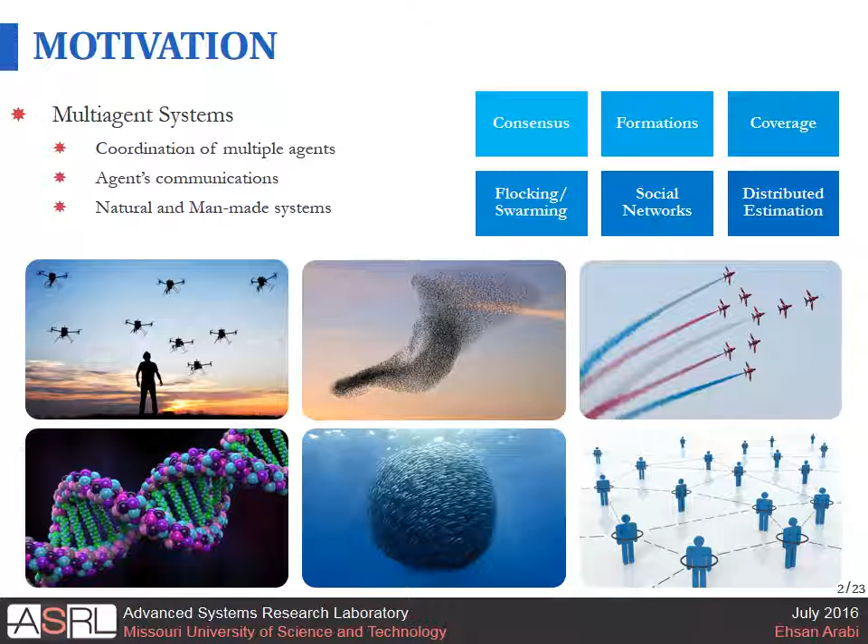So in multi-agent systems, we have two main sections. One is information exchange, and the other one is system computation. And since in a wide range of these systems we have open communication and computation platforms, they are naturally vulnerable to sensor uncertainties and also cyber attacks.

We can consider this problem as a classical estimation and control problem, but by doing so, it can only cover the case where we have just a fluctuation about the true value. But in the sensor uncertainty problem, we have measurement devices that are hijacked to degrade the performance. So this problem cannot be addressed using the classical estimation approach.

Therefore, for the sensor uncertainty problem, we don't know the behavior of the attacker. So we will use adaptive control in order to compensate the effect of sensor uncertainties.

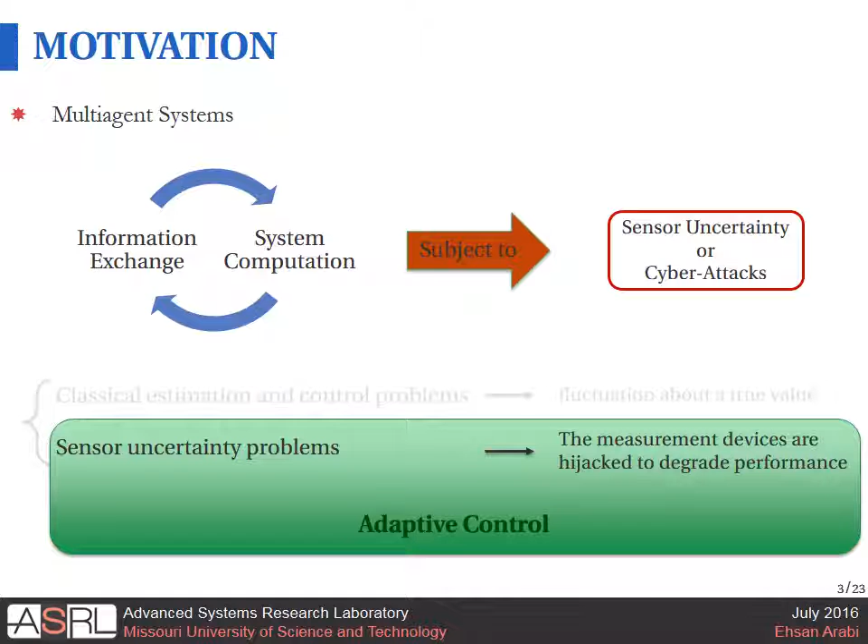As we discussed before, the key feature of multi-agent systems is the information exchange. This information can get corrupted by sensor uncertainties or by cyber attacks. So if we have two agents, I and J, if agent I sends Xi to agent J, it can be corrupted by a signal such as delta I. And it can be a time-varying attack or a constant attack.

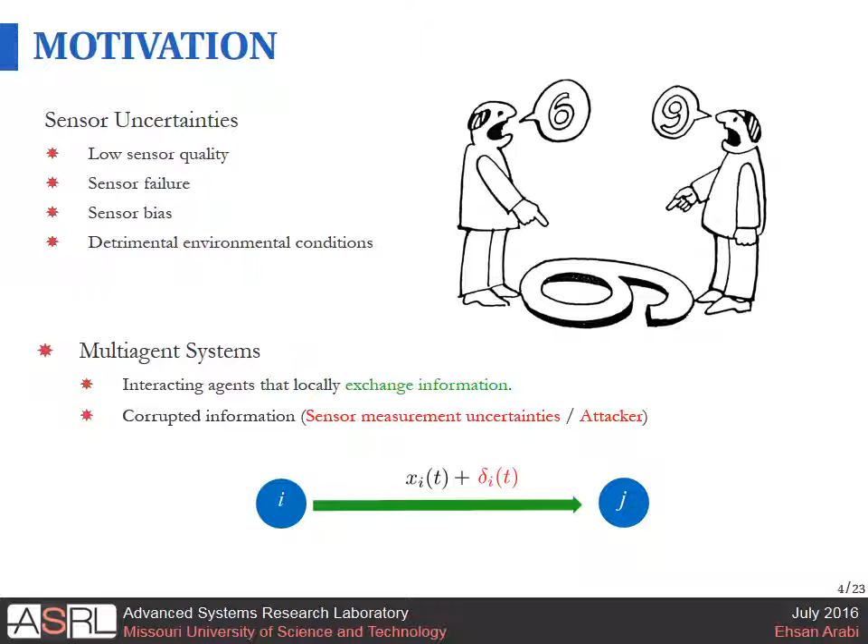We can consider several approaches for sensor uncertainty problems. The first one is classical fault detection, isolation, and recovery. In this method, sensor measurements are compared with an analytical model of the dynamical system, and by analyzing the residual signal we can determine if a fault has occurred or not.

In practice, it is difficult to identify a single residual signal per failure mode. And also, there is a common assumption in this method, which is all dynamical system signals remain bounded during the fault detection process, which is not a valid assumption, especially if we have some attacks that are state dependent.

There is another approach, which is packet losses or disturbances in communication. In this approach, communication links are subjected to disturbances, which correspond to packet losses. And the disturbance model is assumed to follow a particular stochastic process. This model does not necessarily capture the behavior of an attacker.

So, in order to address the sensor uncertainty problem, we will utilize adaptive control architecture to be able to compensate the effect of time invariant and time varying sensor uncertainties.

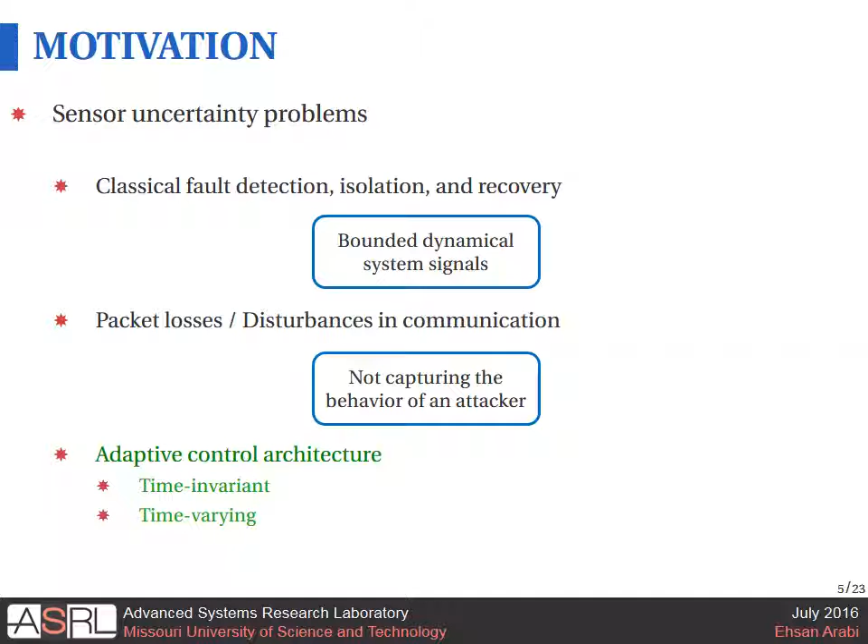Why are we using adaptive control? Because in fixed gain controllers, there's always a trade-off between the performance and the uncertainty. These controllers cannot improve themselves, and also they are tuned to a worst case condition, and they assume that the future will be much like the present.

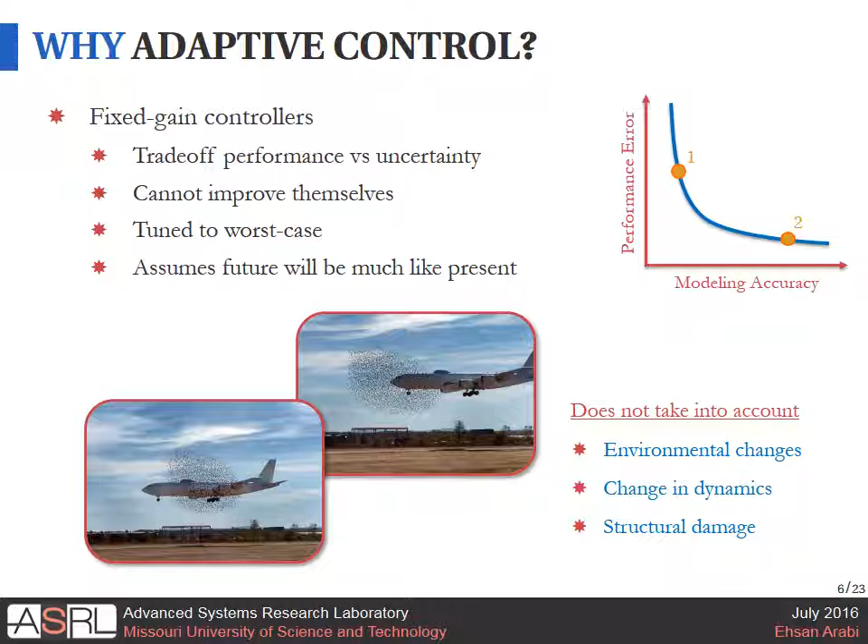And also, fixed gain controllers do not take into account environmental changes, changes in dynamics, and structural damages. As you can see from the figure, for a fixed gain controller, in order to improve the performance, we need an accurate model.

On the other hand, adaptive controllers, they can tune themselves to achieve a given performance, and they do not rely much on the modeling. They can improve themselves under some adverse conditions, and they are not just tuned to the worst case conditions.

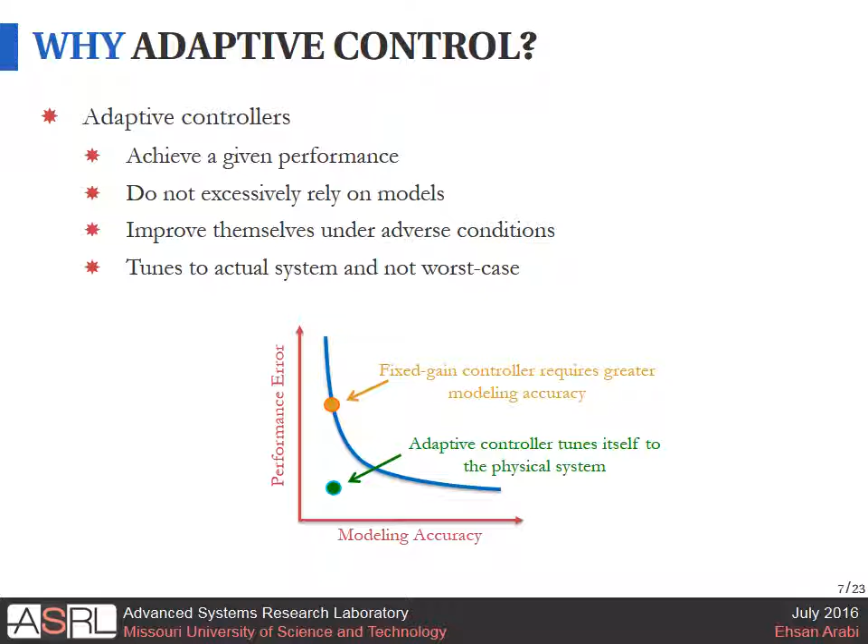So we are going to introduce a problem formulation. We assume we have multiple agents, xi. They have this dynamic: xi dot equals A xi plus B ui, and there's two layers. We have an agent layer, which is a physical layer, and we have another layer which is a control layer.

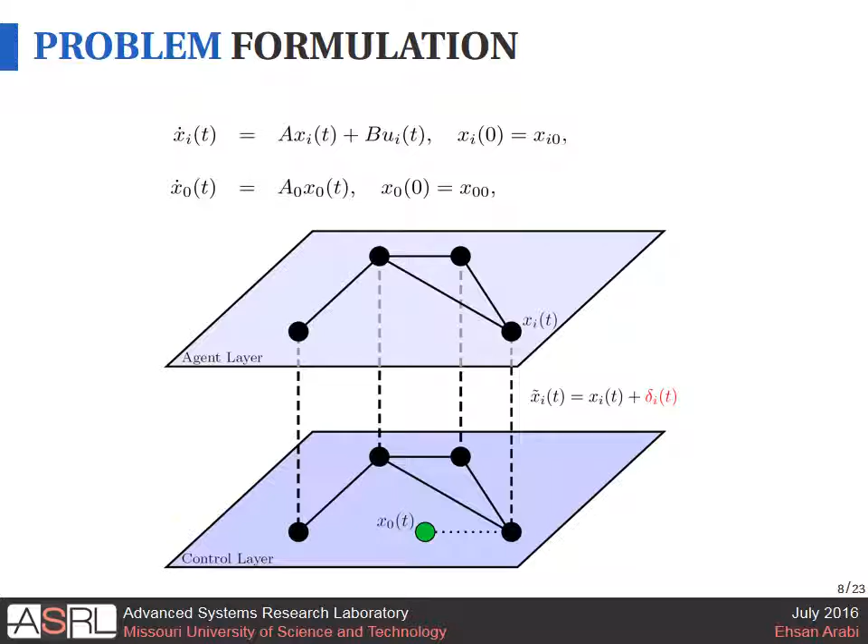So in order to design a controller which can converge all of the agents to follow the leader, if we do not have any uncertainty in the system, if delta I is 0, then we simply can introduce the first expression for ui using the true value of xi and xj in order to achieve the following of the leader.

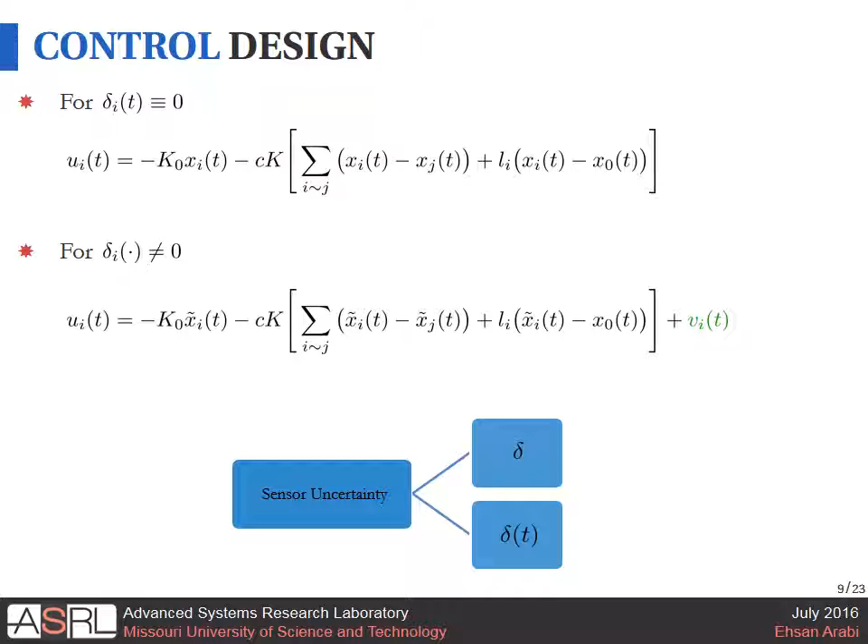But the case that we are considering is that we have sensor uncertainties, so delta I is not 0. For this case, we only can use xi tilde in the controller, which is the corrupted signal. And at the end, we added a signal vi in order to compensate the effect of this sensor uncertainty. Vi is called the corrective signal. And we consider two cases here: a constant sensor uncertainty delta, and a time varying one, delta of t.

For the first case, for time invariant sensor uncertainties, we have just a constant delta. We propose this corrective signal in the blue box vi using estimation of delta, which is shown by delta I hat, and also we have two update laws, delta I hat dot and x I hat dot, in the red box.

And in these update laws, we have a P matrix. We can obtain P by solving the LMI shown in the red box, and in order to avoid some complex computation, we use K matrix as inverse of Q matrix multiplied by B transpose P. This will convert our LMI to a simpler one, and by picking the value for C such that we can achieve the green box, we can solve for P. This LMI can be solved easily using some toolbox, and after solving for P, we can plug this into the update laws and obtain the corrective signal VI.

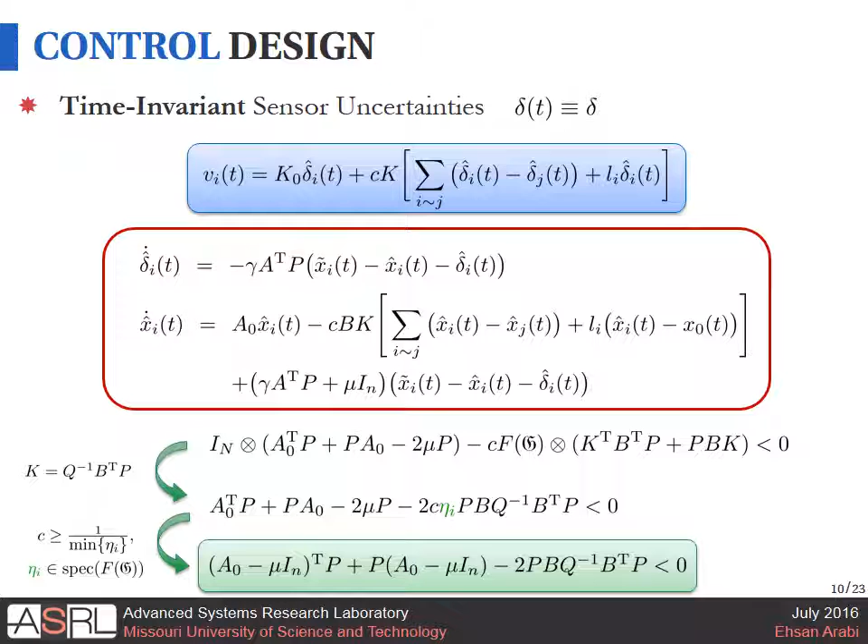So if we define the error signal EI as xi tilde minus x hat minus delta hat, and the estimation error, delta I tilde, equal to delta I minus delta I hat, we can obtain the closed loop system dynamics as shown in the green box.

Now, by using Lyapunov stability and this Lyapunov candidate function, we can achieve Lyapunov stability because v dot is less than or equal to 0. And because v double dot is a bounded term, we can use Barbalat's lemma in order to conclude that E and delta tilde will converge to 0 eventually. And x tilde, x hat, all of them are bounded, and therefore all the signals used in the corrective signal and also in the update laws are bounded.

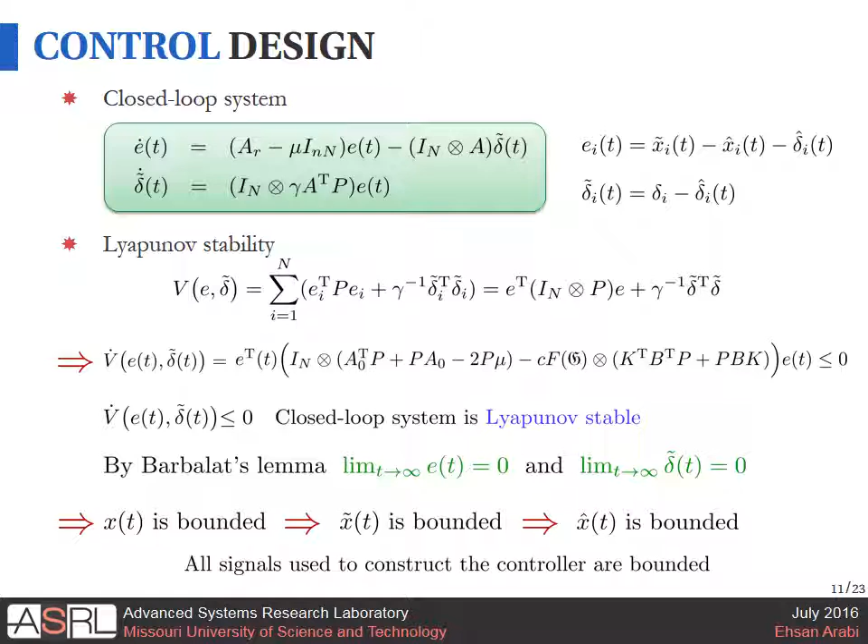Now we move on to the second case, which is time varying sensor uncertainties. For this case, we assume that there is an upper bound for the sensor uncertainty signal delta and also for its derivative. And we propose a similar corrective signal VI and similar terms for the update laws, but we are using a projection operator here in order to guarantee that our update signals are all bounded.

By using these update laws, we obtain the closed loop system like this green box here, and we have defined delta P hat and delta Pi hat on the right.

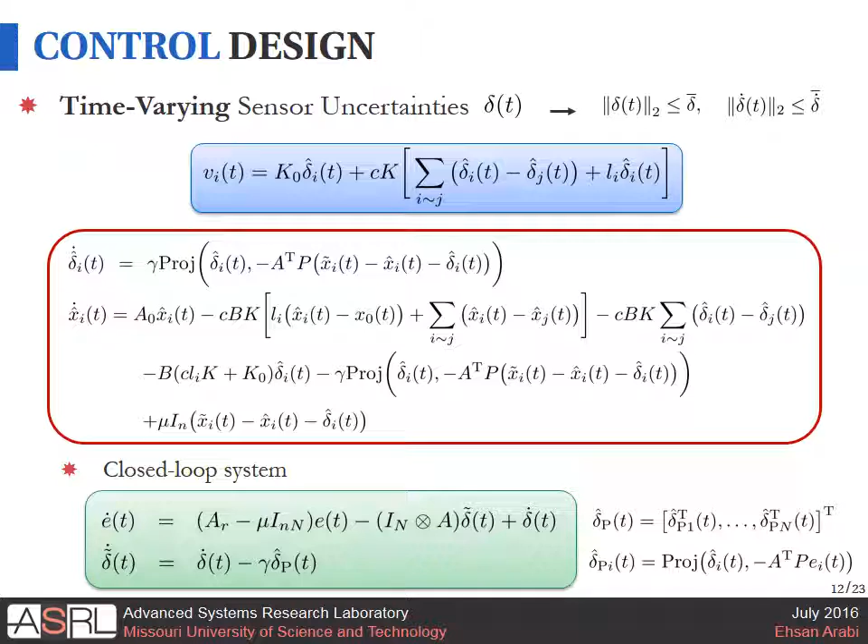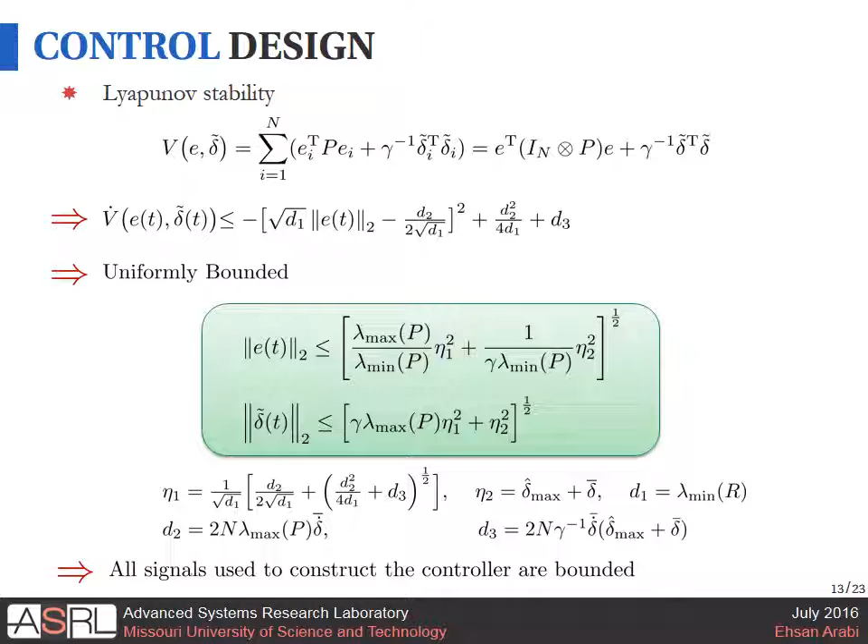Now, by using the same Lyapunov function candidate, we obtain uniform ultimate boundedness for the signals E and delta tilde, and the bound is shown in the green box here. Again, we can say that all of the signals used in the controller and the corrective signal are bounded using this analysis.

Now we introduce two illustrative examples. In the first one, we consider a time invariant case, and in the second one, we consider a time varying case. So we have a system consisting of 4 agents in the agent layer, and we have a leader x0 in the control layer. And we have these dynamics for the agents and the leader.

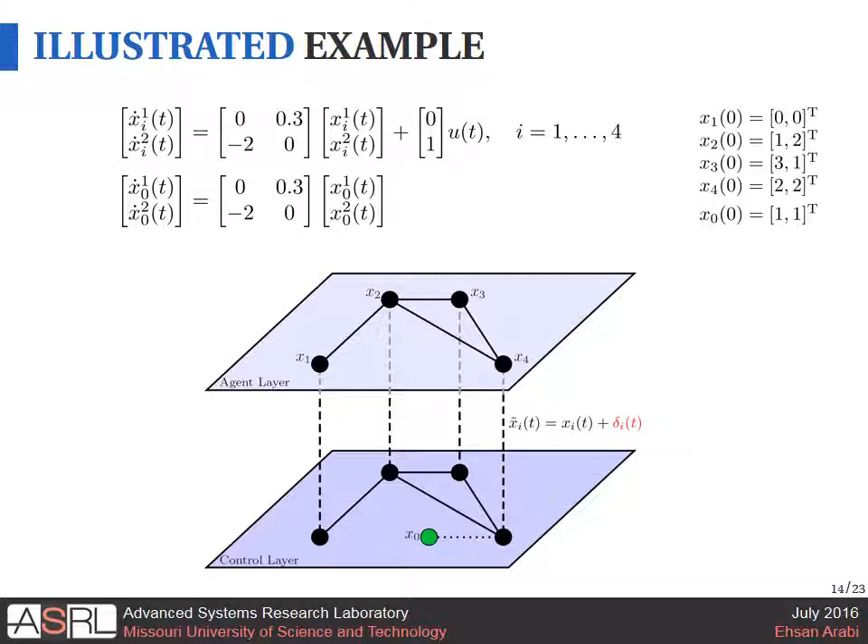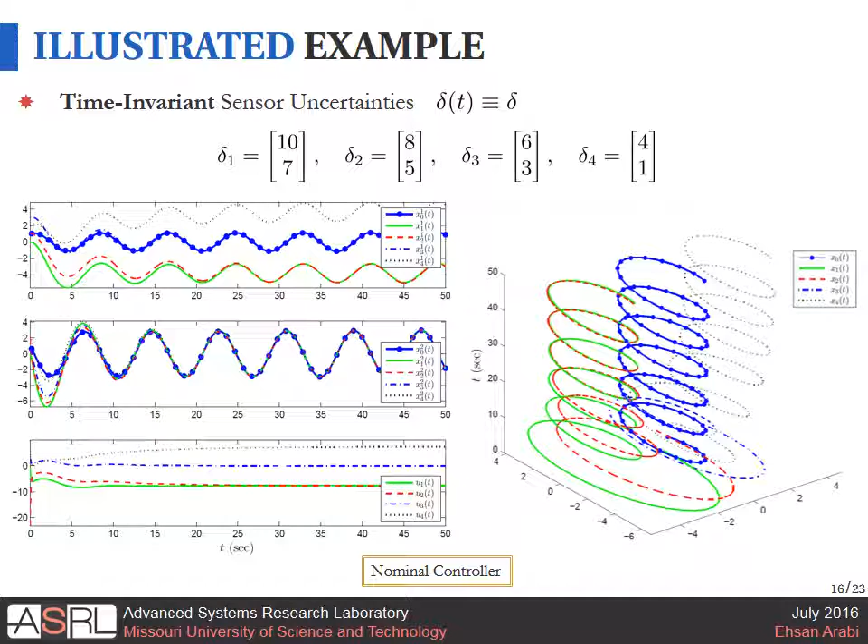Now we add a sensor uncertainty delta, which are constant values like delta 1, delta 2, delta 3, and delta 4, as shown here. And the performance of the nominal controller is shown here. As you can see, the agents cannot follow the leader very well, and they are diverging from each other. So we need to compensate this effect using our proposed controller.

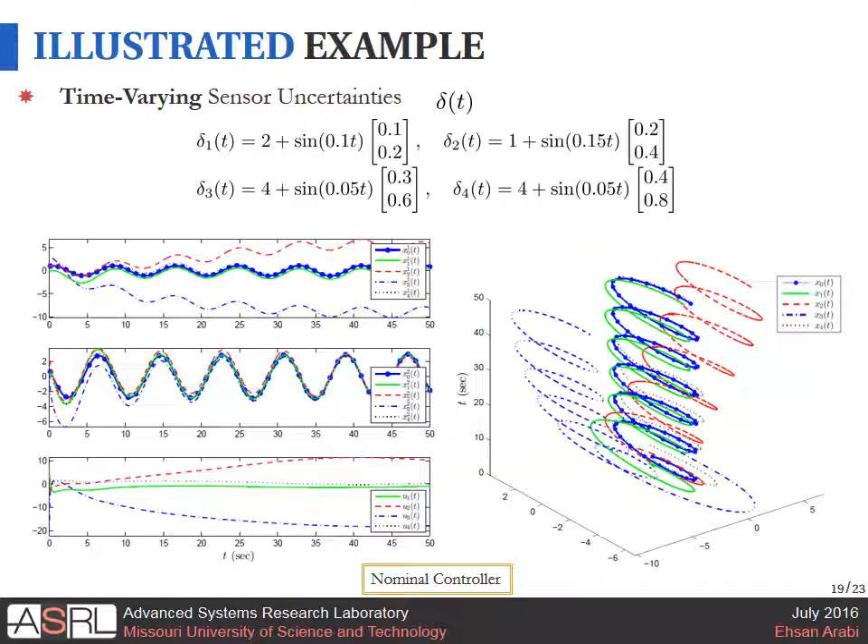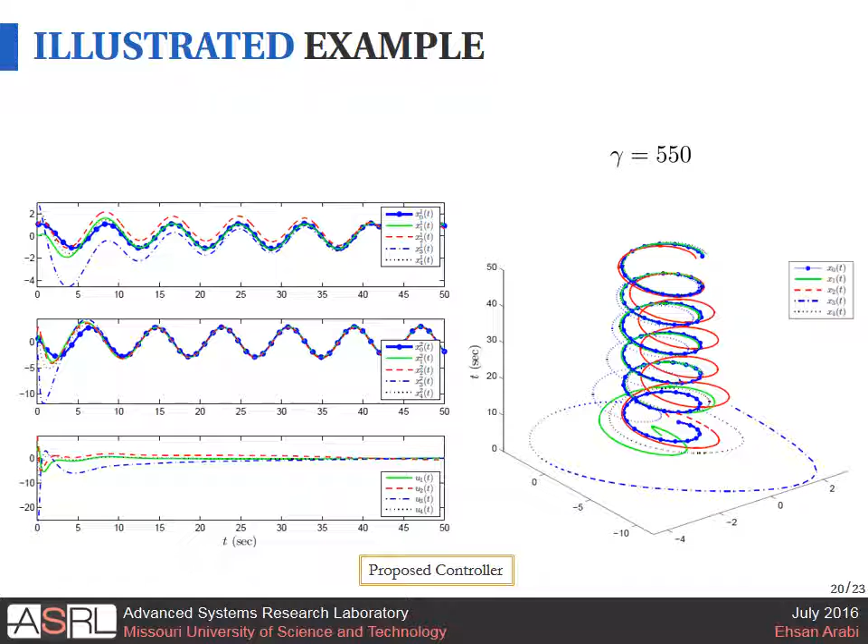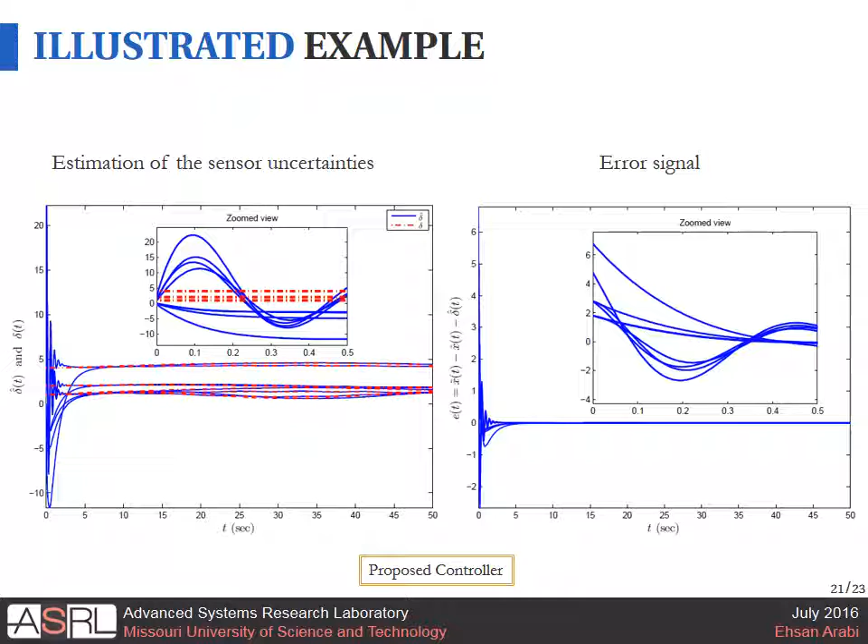Now, if we use our adaptive control architecture, as you can see from the figures, we can achieve uniform boundedness of the signals, and the agents can stay close to the leader. On the left, you can see the estimation of sensor uncertainties, and on the right, you can see the error signal, which is bounded.

So, in conclusion, we considered a multi-agent system, and because information exchange is a key point in multi-agent systems, we consider the case that we have sensor uncertainties or cyber attacks. The proposed controller can achieve asymptotic stability for time invariant sensor uncertainties, and for time varying sensor uncertainties, we can achieve uniform ultimate boundedness. For future research, we will consider output feedback adaptive control, generalization to nonlinear dynamical systems, simultaneous actuator and sensor attacks, and also time varying communication graph topologies.